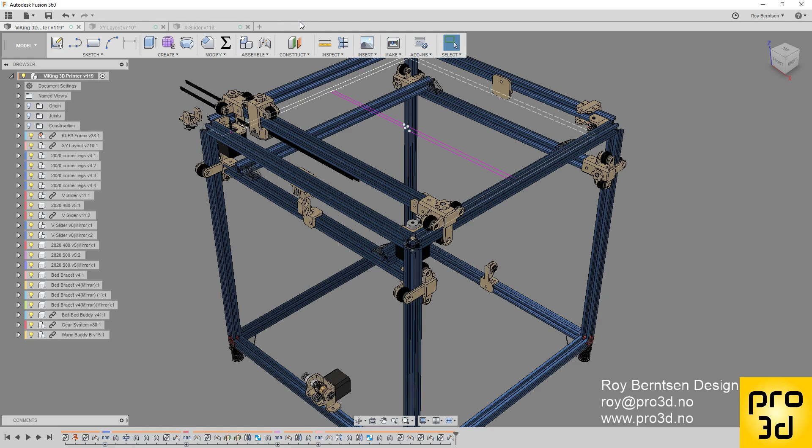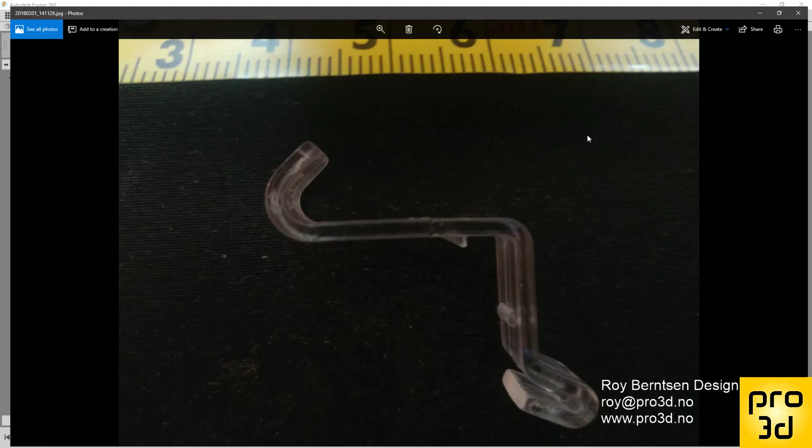So I'm just going to start a new design, and what I want to design today is this clip. I broke one of them. It's for a lamp, and I want to duplicate this one.

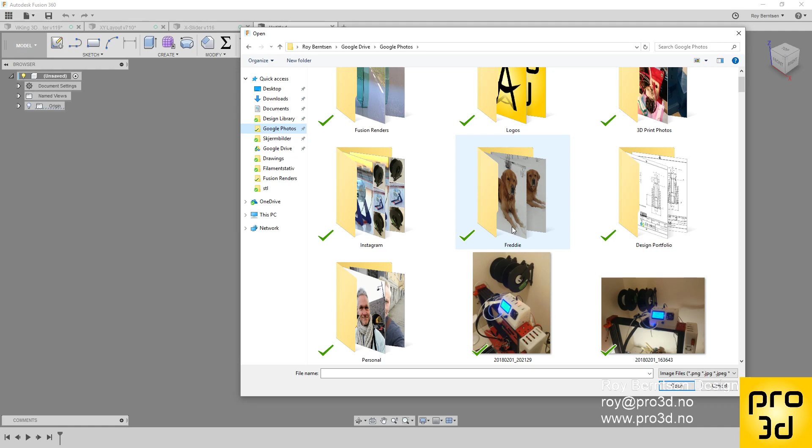So what I'm going to do in Fusion is insert a canvas. I'm just going to design it on this plane, and I pick my photo. I just took a photo with my phone. I'm gonna have this one. I'm just gonna place that over there,

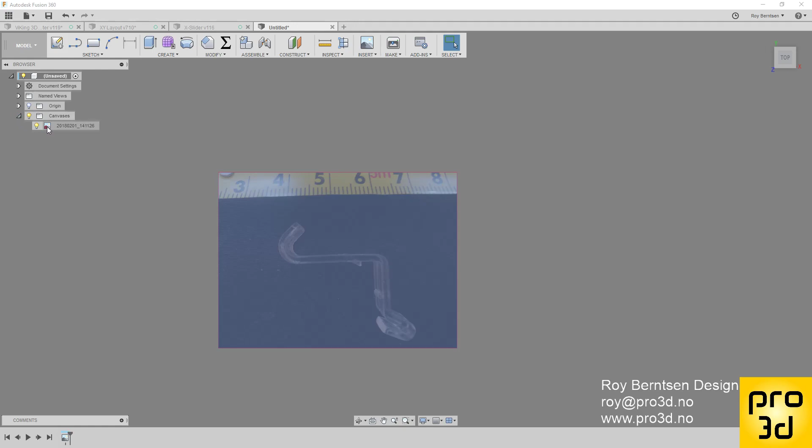and I want to calibrate. I need to calibrate it to be sure that we have the right size. So I'm gonna go from 3 to 8, and that will be 50 millimeters. And then I'm gonna start a sketch on the same plane.

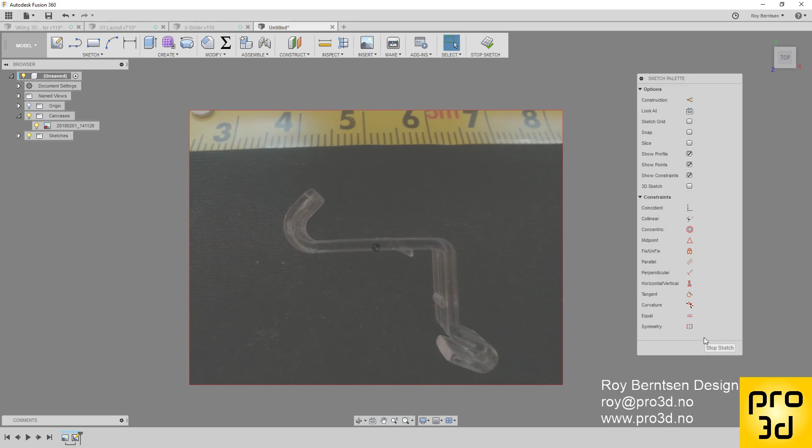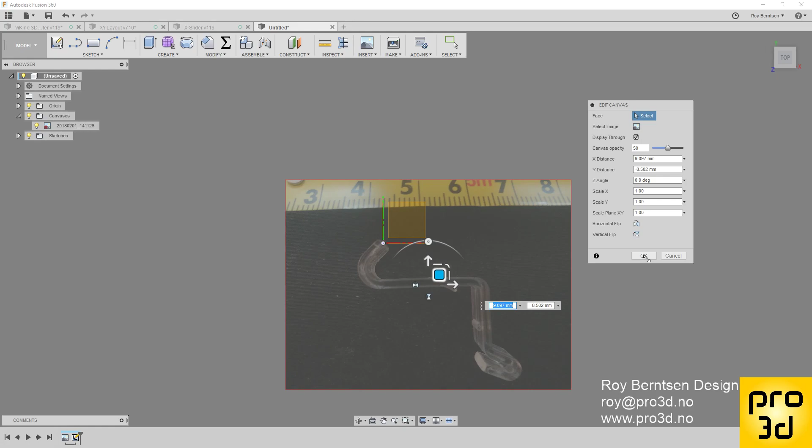Before I sketch, I want to move this canvas a little bit. So I'm gonna start in the 0 point. So I want to have one edge of the clip over there, like this, and then we can just go back to the sketch.

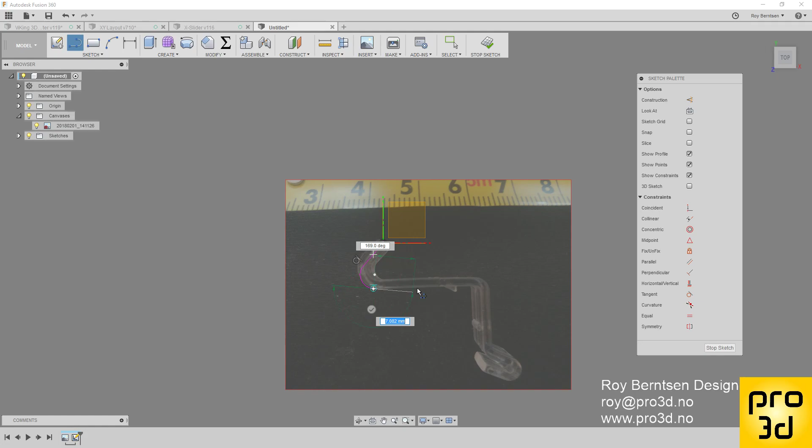Just start with lines. Just a line out here, and just continue with the arc. Then again, line straight right, and then just straight down, and to the right, and then another arc, and finally a line.

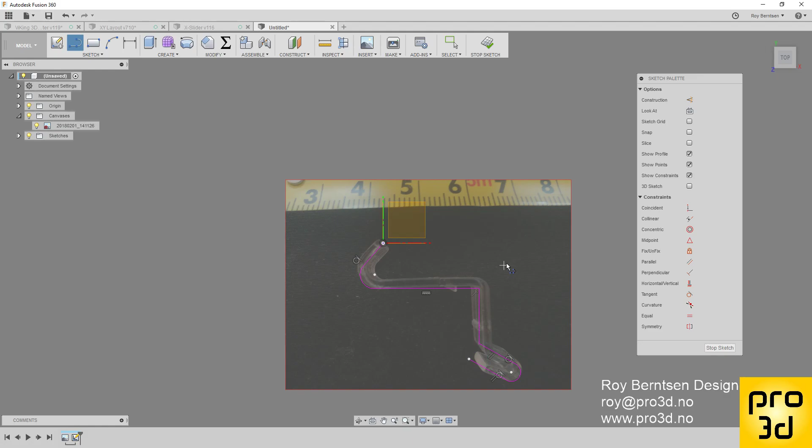Okay, so we need to add one tangent constraint here, and we need to add some dimensions. This one seems to be like 6 millimeters. I think this is like 21, and I think this should be like 3. And over here we have something about 13, and here we have about 7,

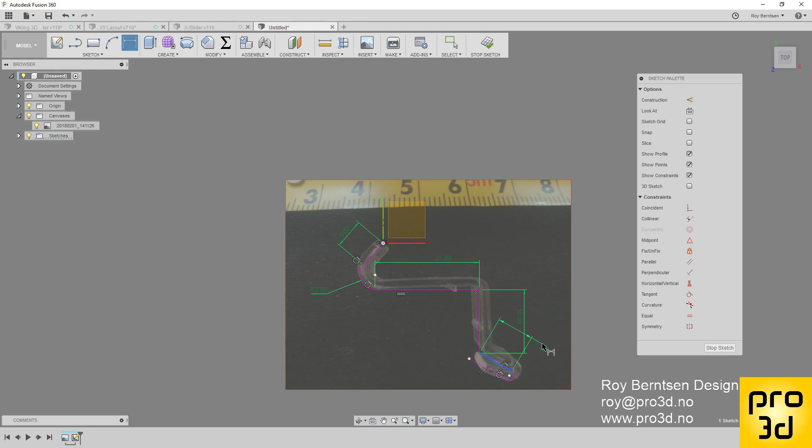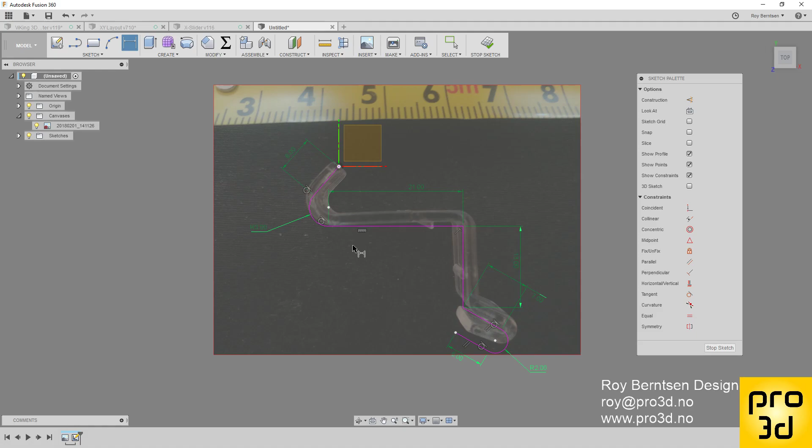and we need the radius here. It should be 2, I think, and this one should be about 6 also. And if we take a closer look at this now, we need some angles. So I think 45 here should be good, and if we add then 30 over here, it should be good.

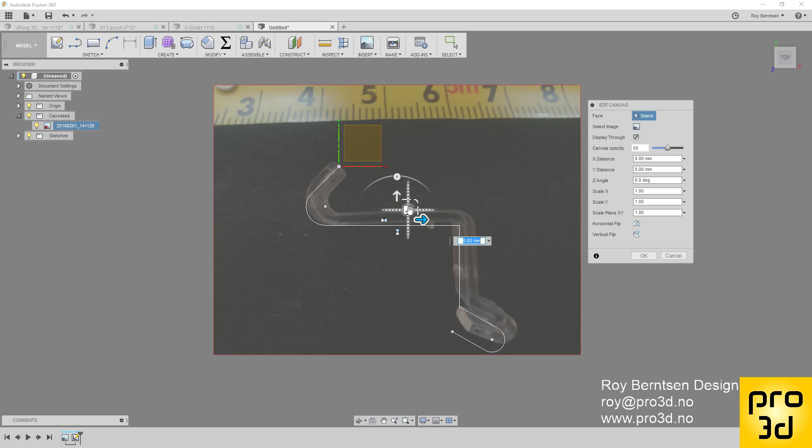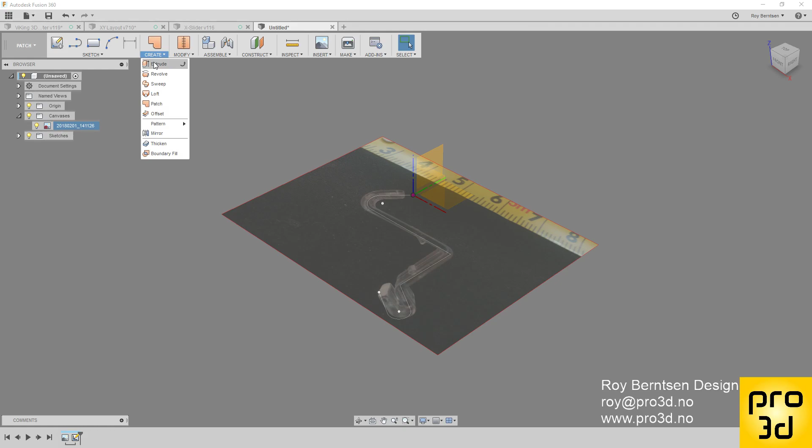If we now just look a little bit closer on the canvas to see if we are close to the design. Looks pretty close, so let's go with that. And then I want to move to the patch space, and I want to go create extrude, and I'm gonna extrude this. It was, I think, 11.5. I measured this guy 11.5 millimeters.

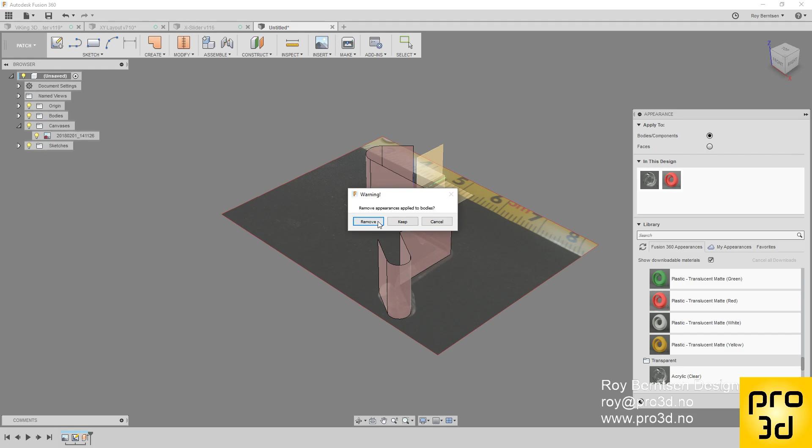I'm gonna add another color so we can see better, like that. Let me put that on the top of the design. This is unsaved. Let's just save it. Lamp clip.

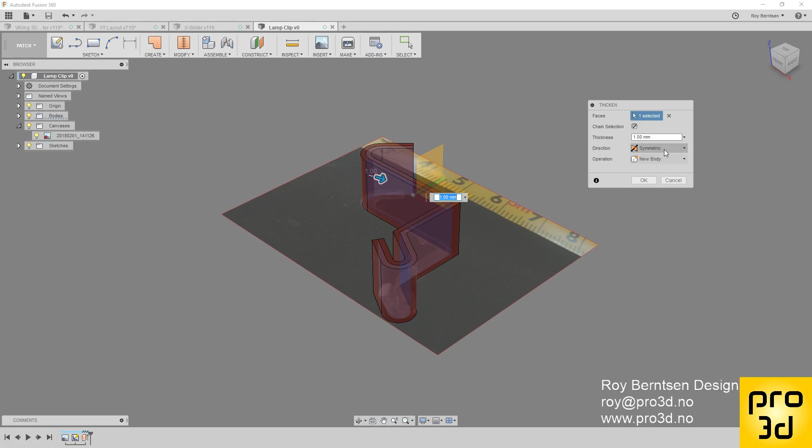Okay, but we need to add some thickness. So create, thicken, and I want it to be symmetric, and it's supposed to be 2 millimeters in the body itself, so 1 on each side of the line. It should be just a new body,

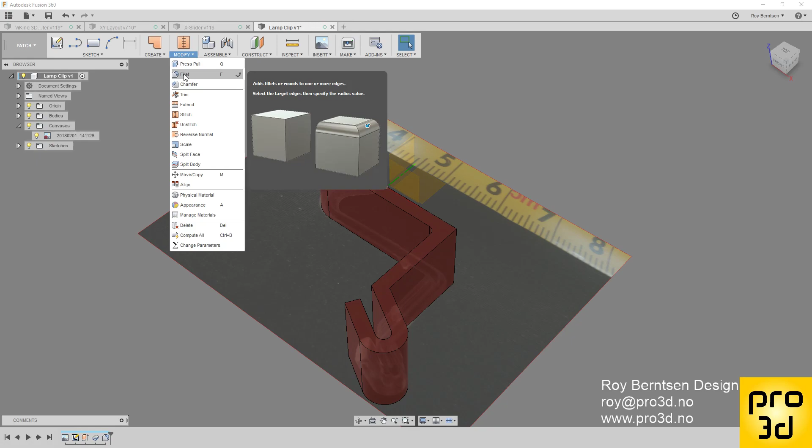and then we just add some fillets inside, 1 millimeter on the inside, and that's up here, fillet, or just F on the keyboard, 2 millimeter outside. Then we are close. I think that will do it for us.

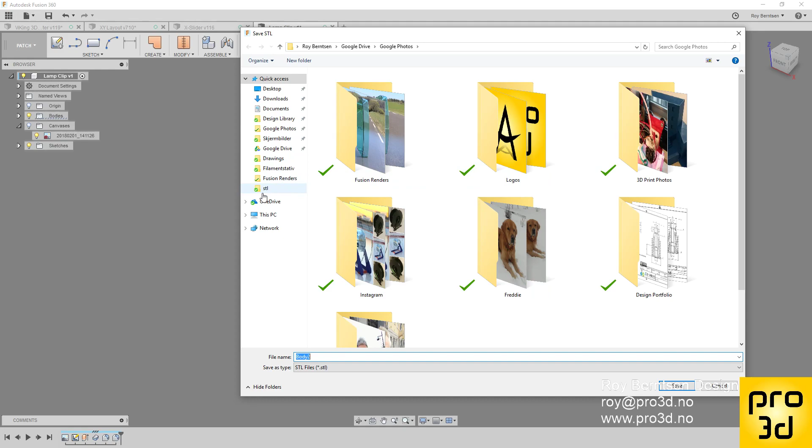And this I'm of course going to 3D print, so I just go make and save this as STL. Lamp clip. That's it for you to print out.

I hope you enjoyed the video, and maybe you can fix something at home with this technique.